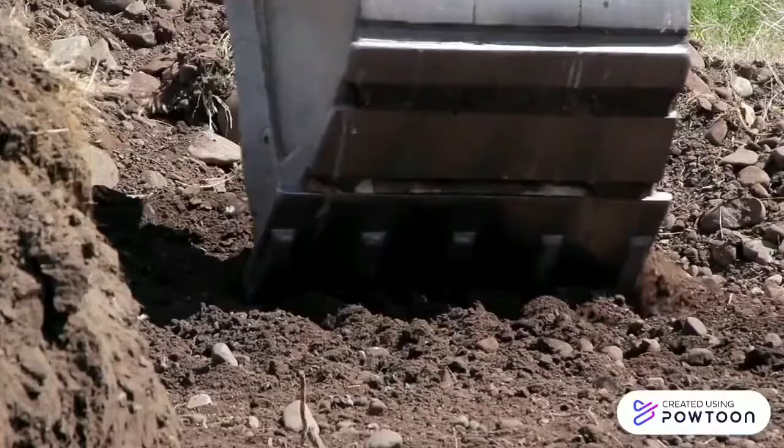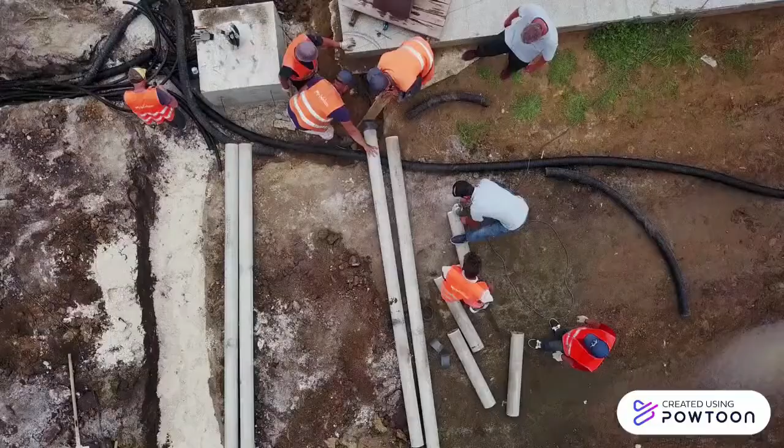I want to present about our company background, which is Geosoil Engineering Sdn Bhd, specialized in geotechnical and civil engineering with 22 years of experience. We focus on geotechnical contracts but expanded our reach to foundation works, ground improvements, coastal protections, and instrumentations. The company also operates in specialties such as rock slope and soil slope rehabilitation, earth retaining structures and foundation works.

Scope of works: foundation work, general civil and building, soil investigation, groundwater drainage works, rock and soil slope rehabilitation, earth retaining structure, ground anchor.

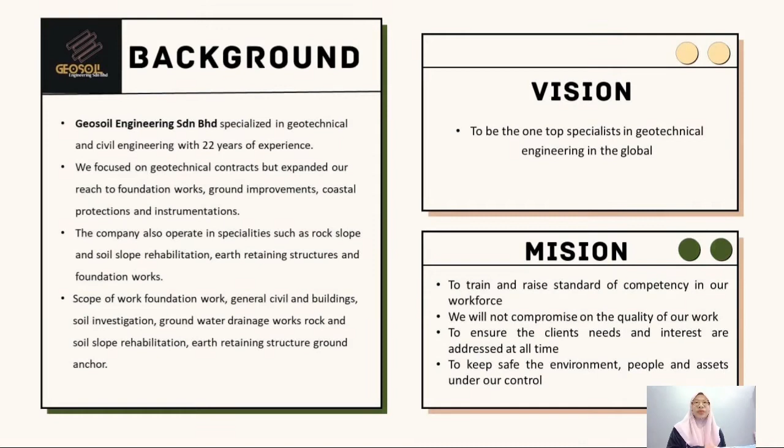Our vision is to be the top specialist in geotechnical engineering globally. Our mission is to train and raise the standard of competency in our workforce. We will not compromise on the quality of our work to ensure the client's needs and interests are addressed at all times, to keep safe the environment, people, and assets under our control.

Next is our organization chart. Our project director is Nur Sabrina binti Daud. Our project manager is Nur Aiman Liyana binti Derahman. Site supervisor is Ain Amira binti Omar. And design engineer is Nur Hafidah binti Mohamad Nasir.

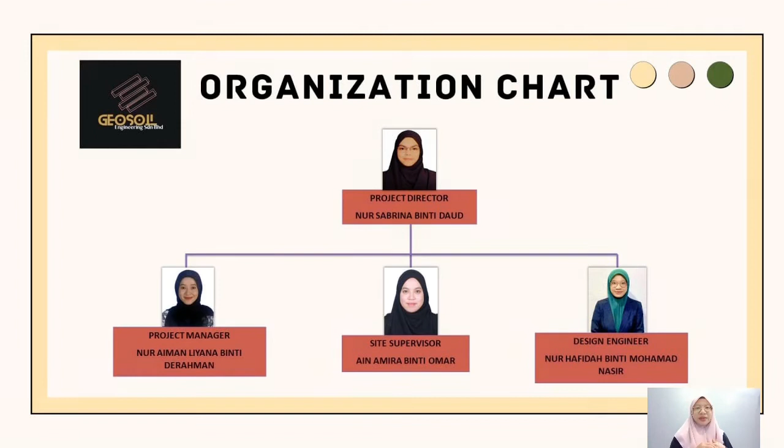The title of our project is the development of Marunda Center at Jitra, Kedah.

About our project: the Government of Malaysia via Jabatan Kerja Raya has opened the tender for a design and build contract. JKR has carried out a number of subsoil condition surveys, including exploratory boring, undisturbed sampling, and laboratory tests in the commercial area for the development of Marunda Center. The developer shared the soil data as obtained with the JKR study team.

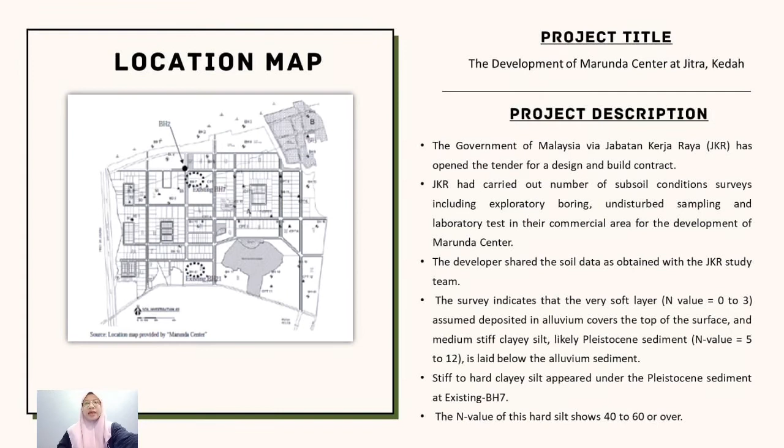The survey indicates that a very soft layer with N value equal to 0 to 3, deposited as alluvium, covers the top of the surface, and medium stiff clayey silt, likely Pleistocene sediment with N value equal to 5 to 12, lies below the alluvium sediment. Stiff to hard clayey silt appeared under the Pleistocene sediment at existing BH7. The N value of this hard silt shows 40 to 60 or over.

Next is analysis of soil investigation. The first standard is the standard penetration test, carried out according to BS 1377: part 9: 1990, method 3.3, using an open-ended longitudinal split spoon sampler with a cutting shoe at the lower end and a coupling at the upper end connecting the sampler to the AW rod.

Next is undisturbed and disturbed soils. Representative samples of disturbed and undisturbed soil were taken during the investigation and sent to the laboratory for visual inspection and testing. Additionally, the split spoon sampler was used to collect soil samples for disturbed areas.

Next is the direct shear test. The consolidated drained strength characteristics of a sample are measured using the direct shear test. When a single shear plane is subjected to a normal load and constant strain rate, the load response is recorded. The common shear strength characteristics can be found by performing this test under different normal loads.

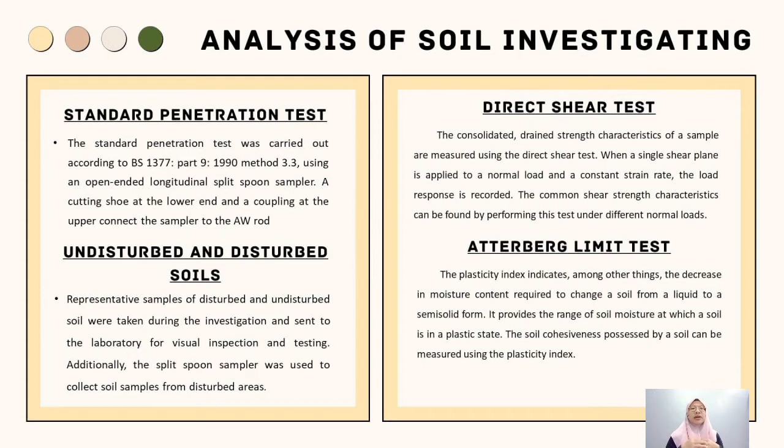Last is the Atterberg limit test. The plasticity index indicates, among other things, the decrease in moisture content required to change a soil from a liquid to a semi-solid form. It provides the range of soil moisture at which a soil is in a plastic state. The soil cohesiveness possessed by a soil can be measured using the plasticity index. Thank you.

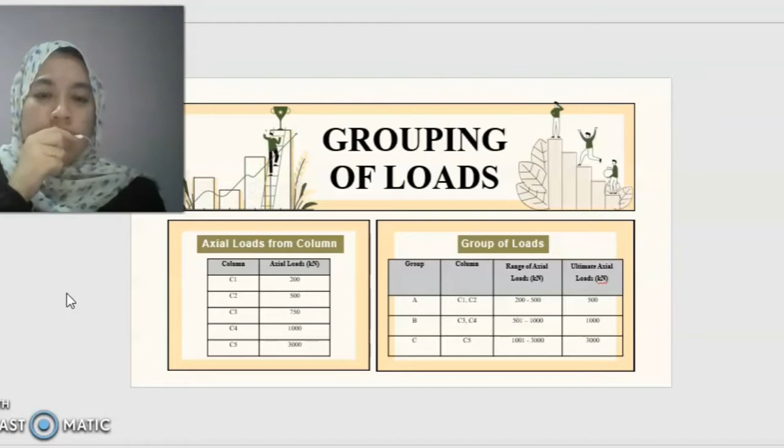We also separated the group into three groups. Group A covers column C1 and C2, group B covers C3 and C4, and the last, group C, covers C5.

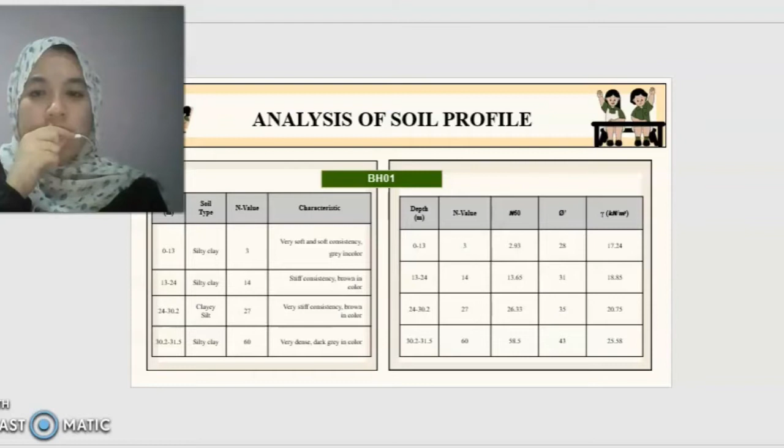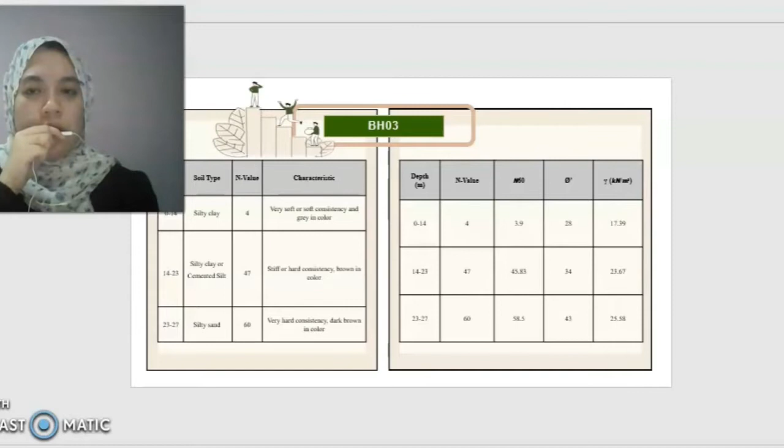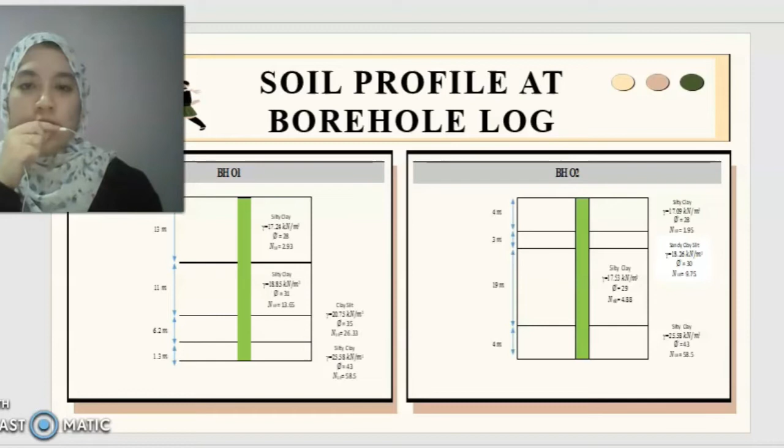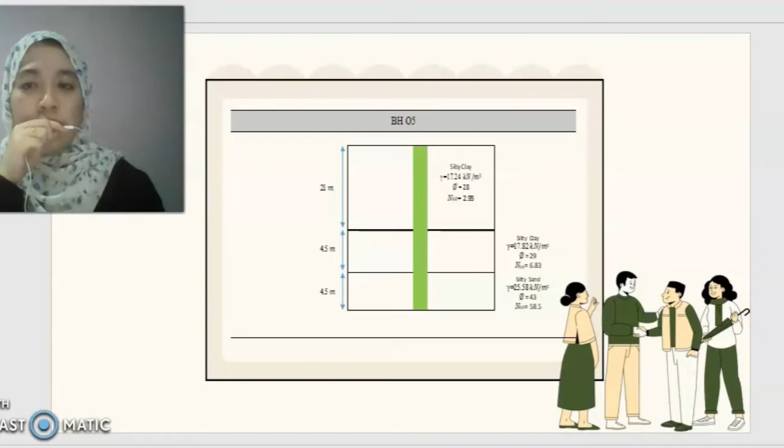For the foundation drawing, we split into three groups: group A, group B, and group C.

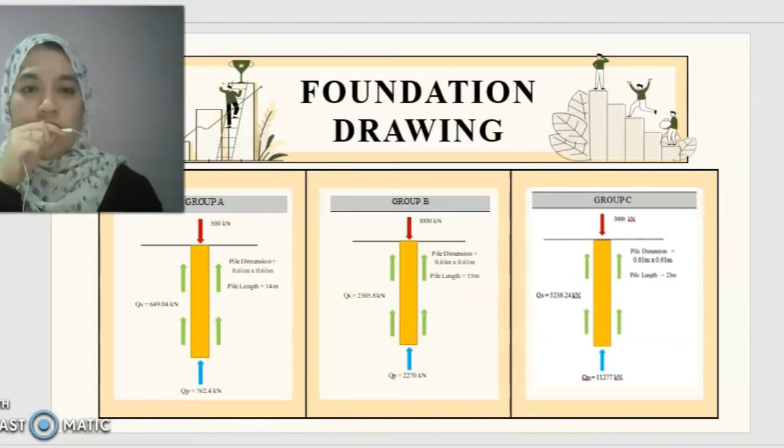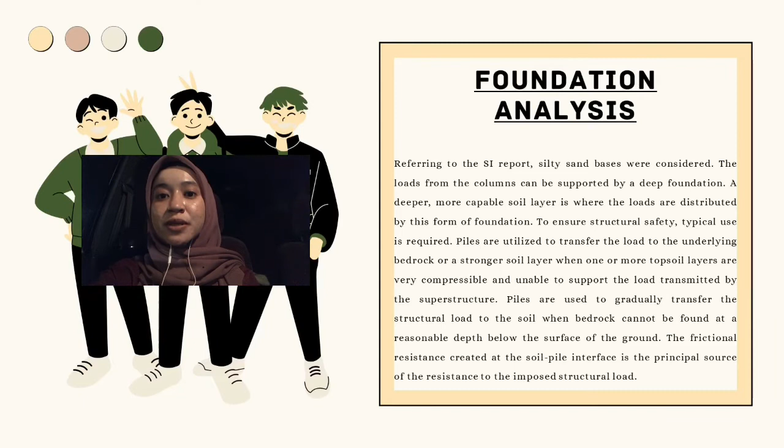A deeper, more capable soil layer is where loads are distributed by this form of foundation. Piles are utilized to transfer the load to the underlying bedrock or a stronger soil layer when one or more topsoil layers are very compressible and unable to support the load transmitted by the superstructure. Piles are used to gradually transfer the structural load to the soil when bedrock cannot be found at a reasonable depth below the surface of the ground.

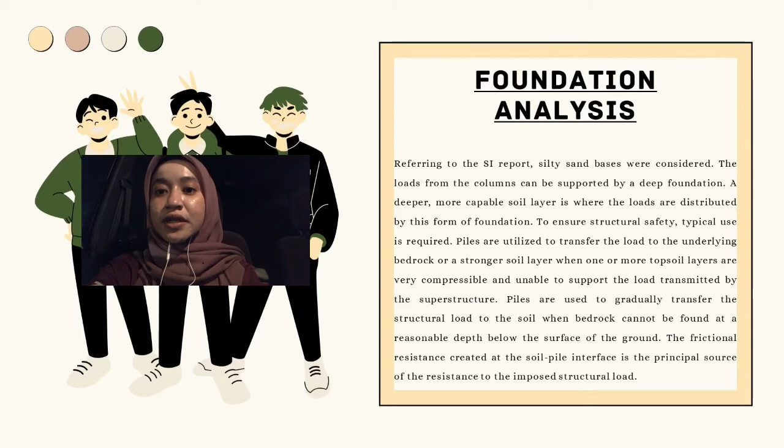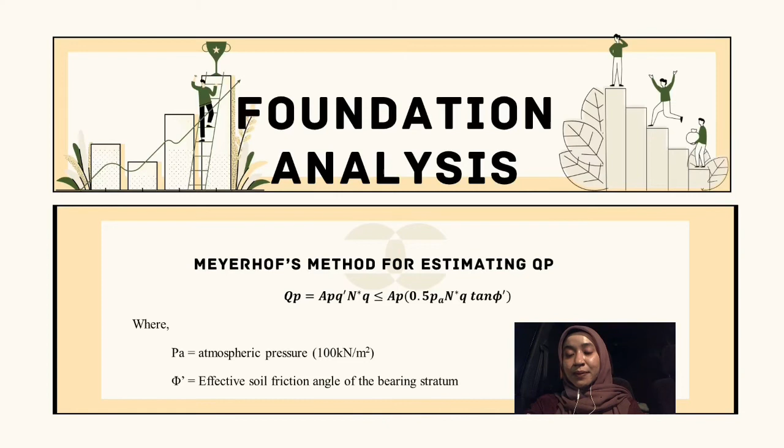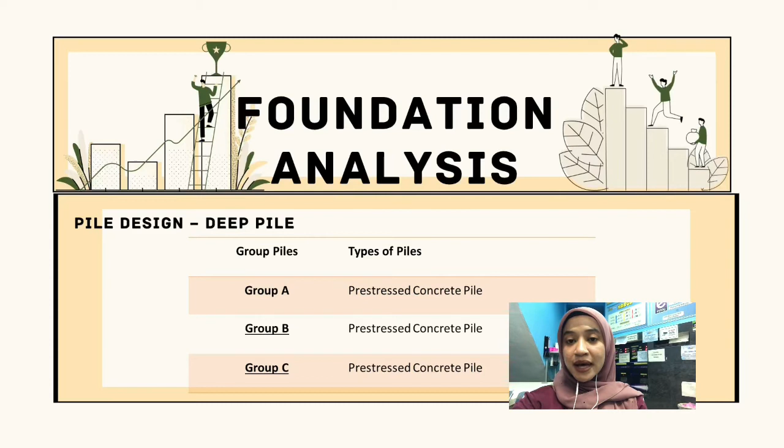For the pile design, the deep pile has three groups: group A, group B, and group C, with the same type of pile, that is pre-stressed concrete pile. This is a summary of the pile design.

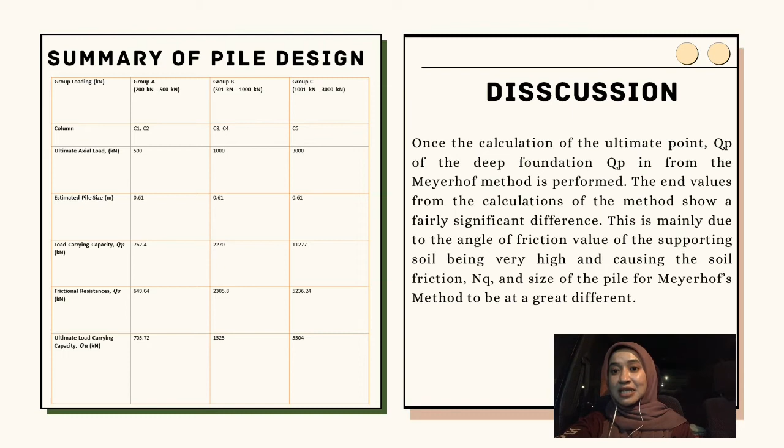We can see here the ultimate load carrying capacity QU for group A is 705.72 kN, for group B is 1525 kN, and for group C is 5504 kN.

Once the calculation of the ultimate point QP of the deep foundation for the Meyerhof method is performed, the end values from the calculation show a fairly significant difference. This is mainly due to the angle of friction value of the supporting soil being very high, causing the soil friction, Nq, and size of the pile for the Meyerhof method to be at a great difference.

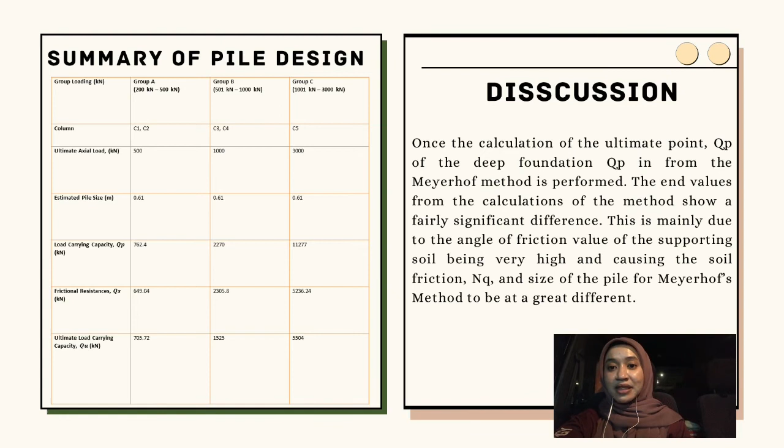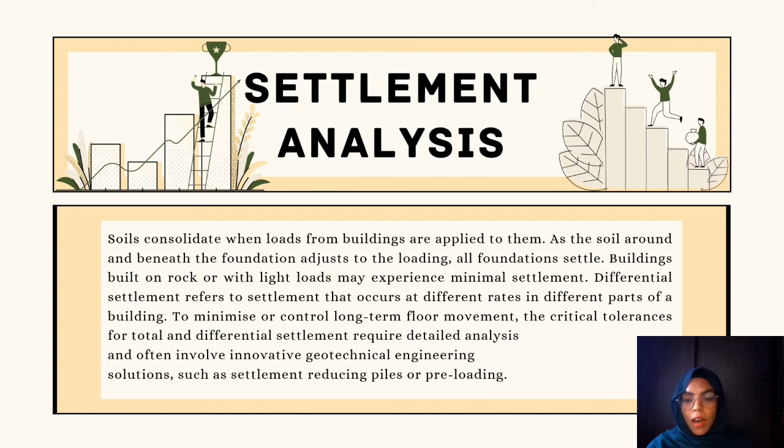For group A, the total settlement is 17.6 mm. For group B, 53.4 mm. For group C, 256.3 mm.

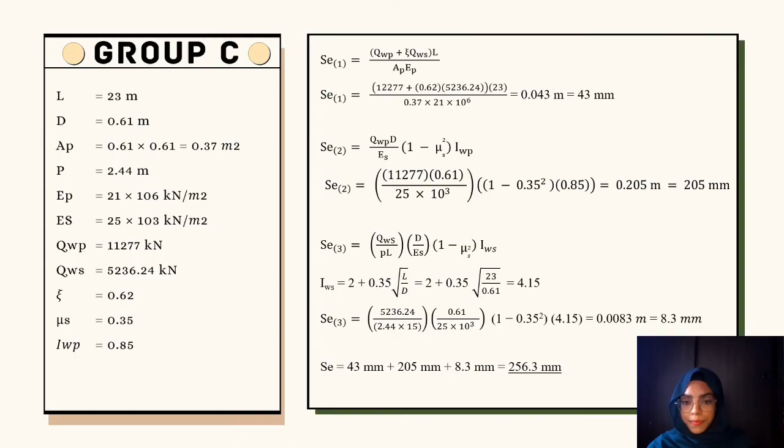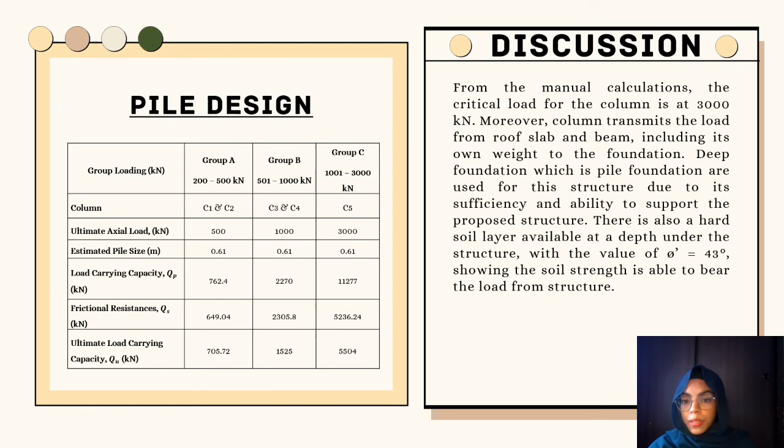From the manual calculations, the critical load for the column is 3000 kN. Moreover, the column transmits the load from the roof slab and beam, including its own weight, to the foundation. The pile foundation is used for the structure due to its sufficient ability to support the proposed structure. There is also a hard soil layer available at depth under the structure, with a value of 43 degrees showing the soil strength is able to bear the load from the structure.

The calculation of the Meyerhof method for the QP load carrying capacity of the pile has been carried out. The values from the Meyerhof calculation show fairly significant differences. This is largely due to the angle of friction value between the resultant frictional force and the normal reaction with the normal force of the supporting soil being extremely high, causing the bearing capacity to have great differences.

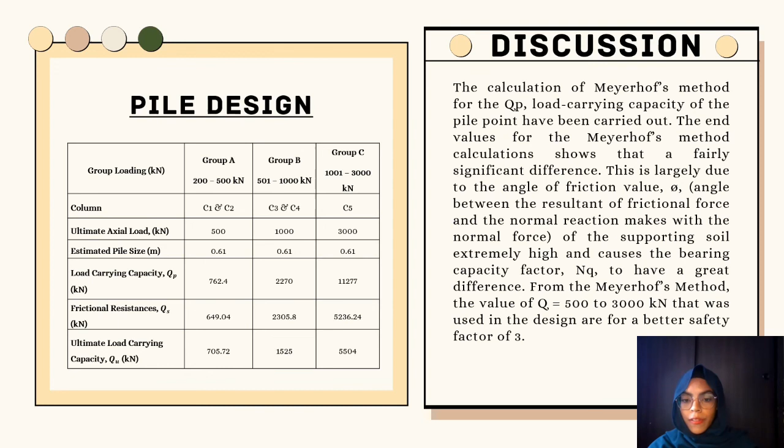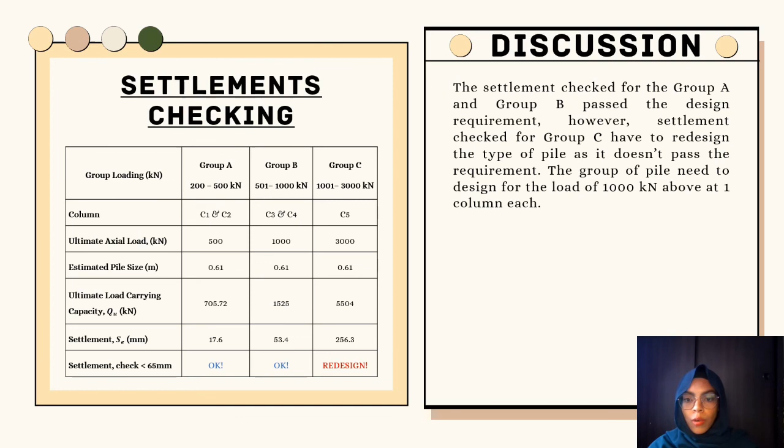From the Meyerhof method, the value of Q is 500 to 3000 kilonewton that was used in the design with a better safety factor of 3. The settlement check for group A and group B passed the design requirement. However, the settlement check for group C requires a redesign; the type of pile doesn't pass the requirement. The group of piles needs to be designed for a load of 1000 kilonewton or above at one column each.